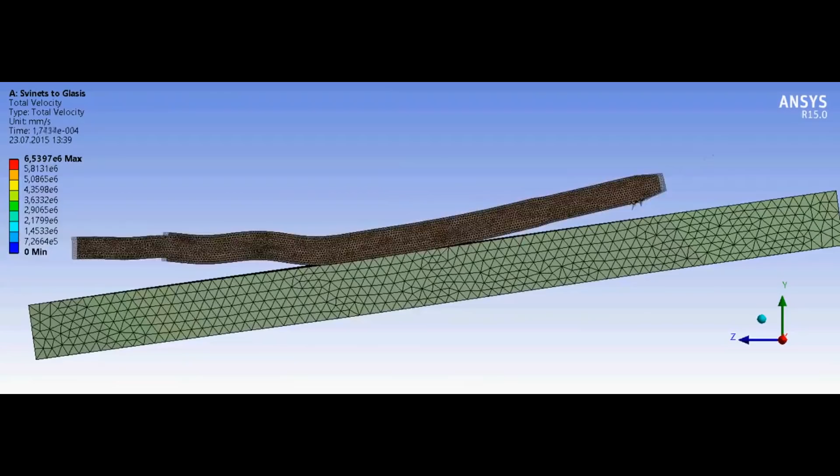Even more so, some even claim APFSDS can't even ricochet to begin with, and that they would shatter instead of ricocheting. While some might want to believe that Abrams' upper front plate will shatter any projectile that comes in contact with it, reality is far more disappointing. First of all, you might say Abrams' upper front plate was specifically designed for that, to shatter or deform incoming penetrators. And I would say you are very likely correct.

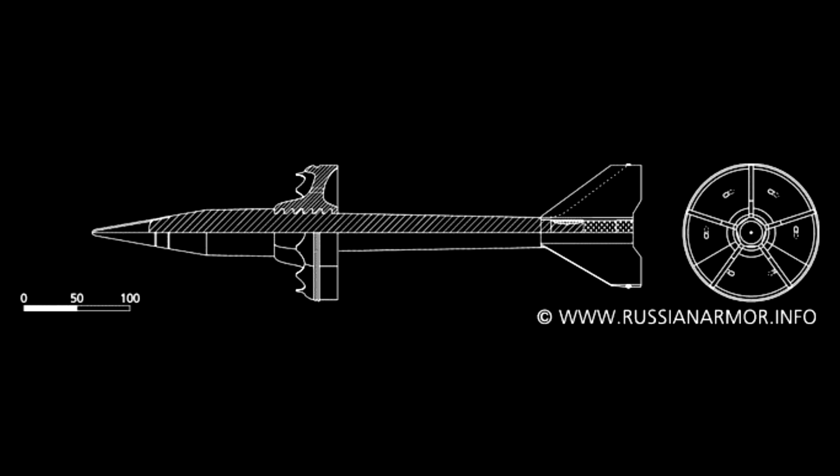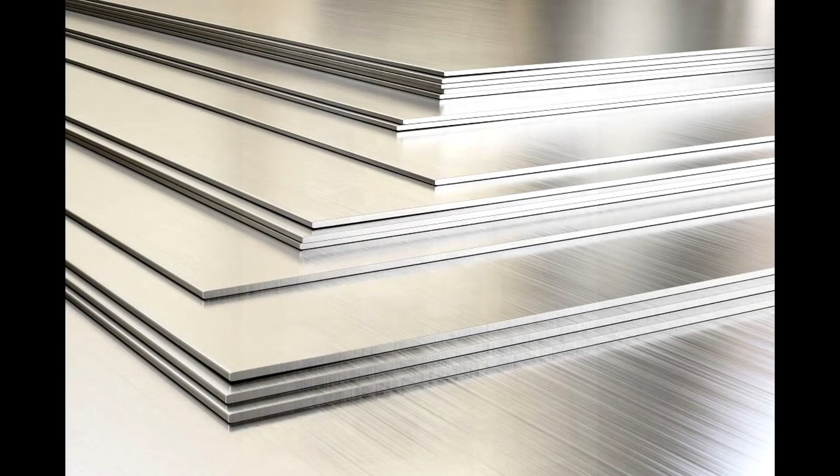But when this armor was designed, it was meant to protect against Soviet steel penetrators that would or would not have a small tungsten core at the tip of the projectile. This was very likely to shatter or deform since the material is much softer than what later projectiles adopted. Mainly, we are comparing sheet-grade steel to tungsten heavy alloy, tungsten carbide, or depleted uranium.

You might also say Russian tanks also have weak spots, why don't you mention them? And all I have to say is, this video is not about them. I am well aware they have problems. This video is about APFSDS shattering on the upper front plate of Abrams.

But what is shattering anyway? It seems to me people are led to believe that APFSDS shattering results in complete disintegration of the projectile into a bunch of tiny bits. I mean, glass shatters like that, right? Well, the problem with APFSDS shattering is that it usually shatters on one part, where the other part usually breaks off, and since it lost all the initial momentum, it can behave like a less powerful projectile, and those leftovers can still do a lot of damage.

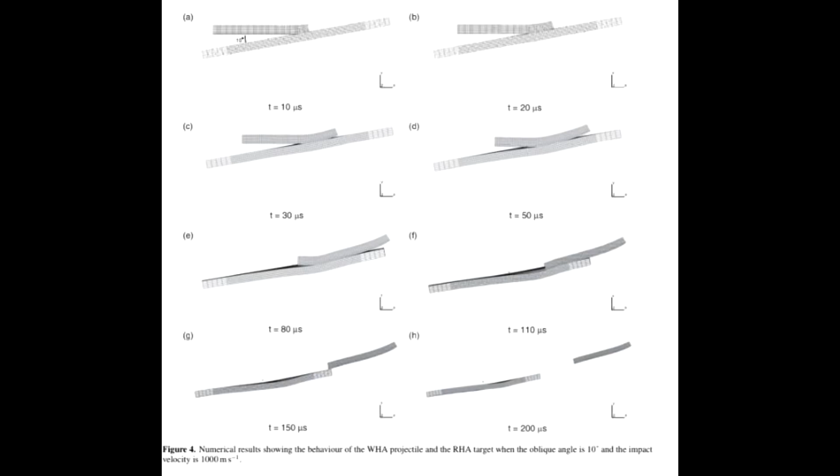In the case of Abrams, they can continue riding the upper plate and strike the turret ring, ultimately jamming it. But that is more likely to occur with longer projectiles. Old Soviet steel projectiles might not have enough energy left to achieve anything, so against them it probably was useful. But now we come to tungsten.

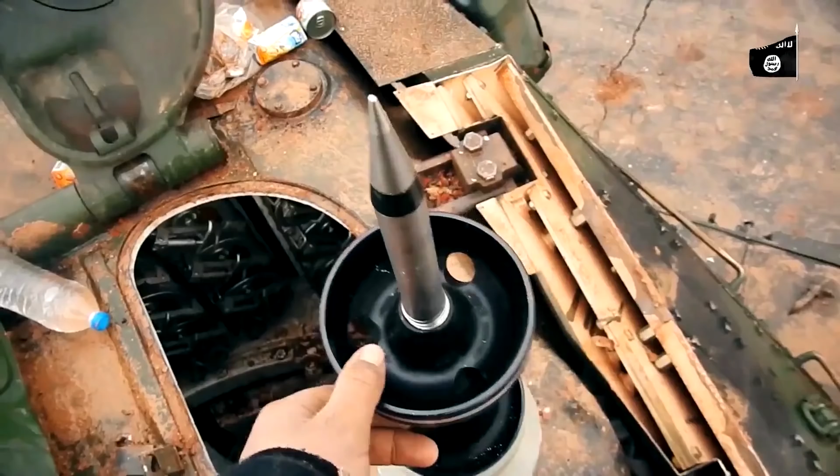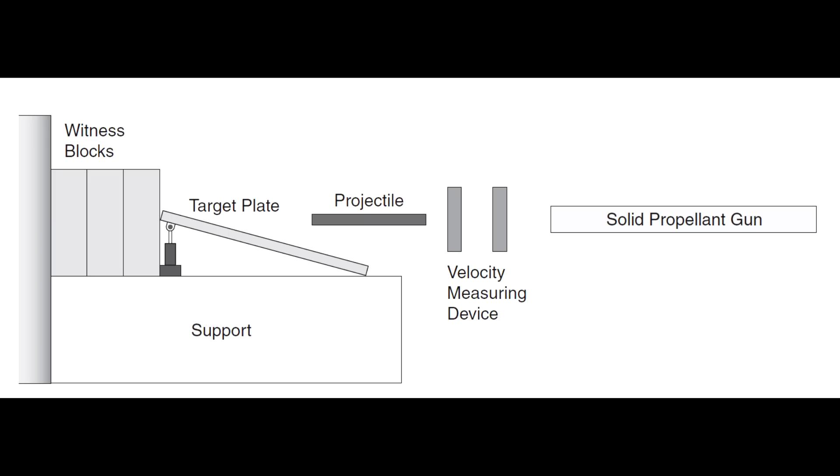There have been lab tests done to test the behavior of WHAs, or tungsten heavy alloys, on oblique angles. The penetrator had a length to diameter ratio of 10.7, which is even short for modern standards, since those tests are almost two decades old. The target plate was of similar thickness as the diameter of the projectile, and it was made out of class 4 rolled homogeneous armor, which is apparently similar to what Abrams might be using.

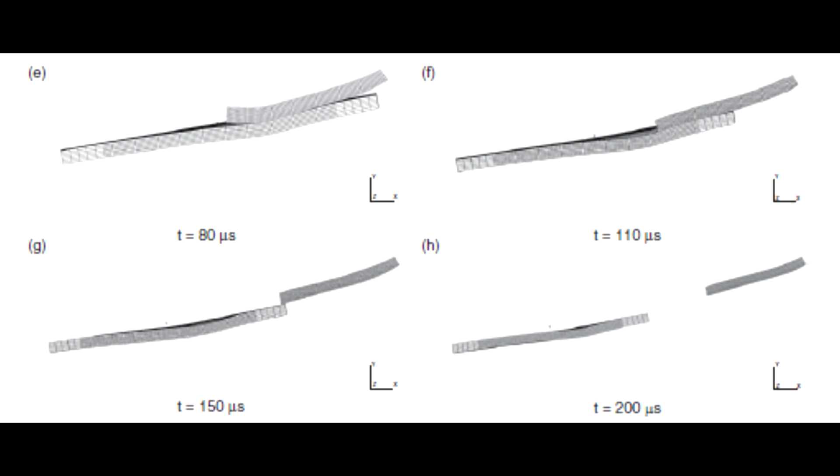It was concluded that the velocity had a massive impact on the angle where a critical ricochet would occur. That is a ricochet, by the way, not shattering. Shattering might occur at even lower angles. But anyway, here is a quote from the document.

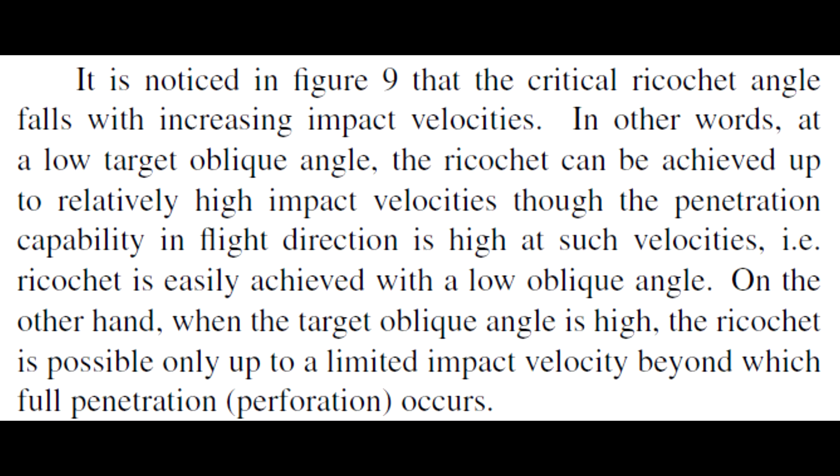"It is noticed in figure 9 that the critical ricochet angle falls with increasing impact velocities. In other words, at a low target oblique angle, the ricochet can be achieved up to relatively high impact velocities, though the penetration capability in flight direction is high at such velocities, i.e., ricochet is easily achieved with a low oblique angle. On the other hand, when the target oblique angle is high, the ricochet is possible only up to a limited impact velocity, beyond which full penetration, perforation, occurs."

This basically means that complete penetration will occur until a critical angle is achieved. Once it reaches a critical point, it will start bouncing off. On this chart, the white square marks where the projectile achieved perforation on the plate, and the black one where the projectile ricocheted. As you can see, at a velocity of 1500 meters per second, the critical ricochet angle is at 5 degrees, while at around 6 degrees there was a complete perforation of the plate.

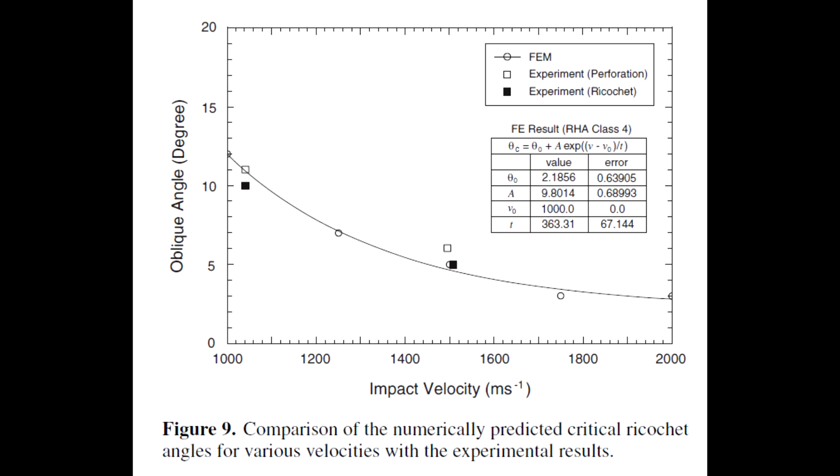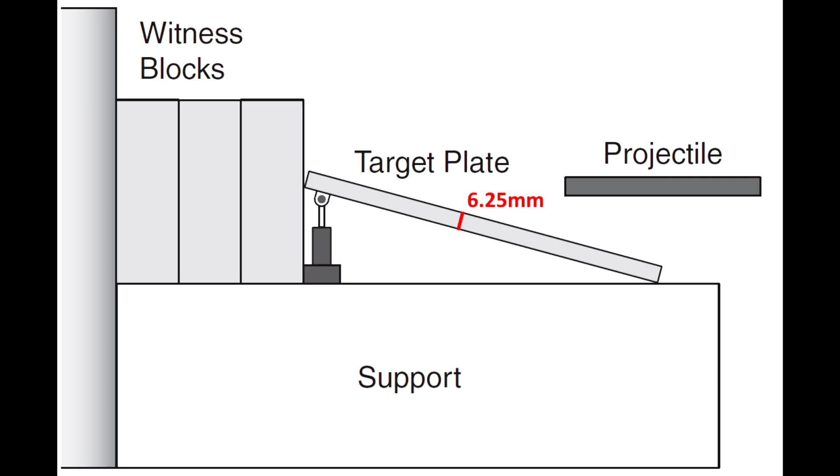There are even images of the tests in the document. This is how the targets were set up: one very sloped plate and 3 thick witness blocks at the end. The witness blocks are each 38mm thick. The target is 6.25mm thick. The projectile is 75mm long and has a diameter of 7mm.

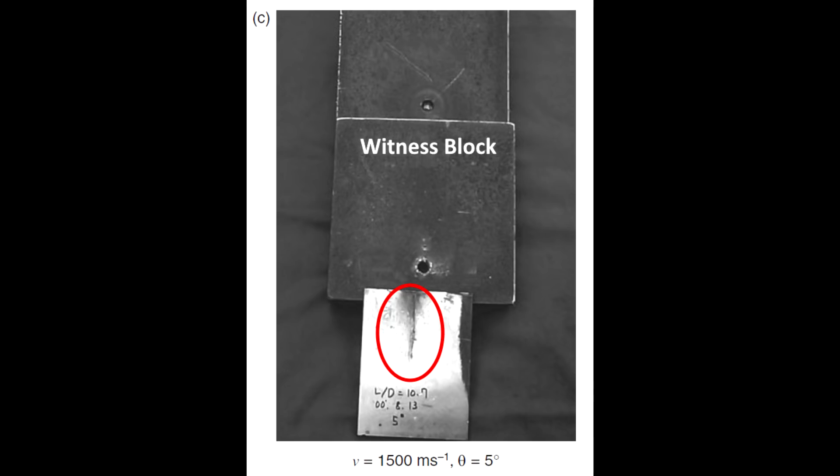As you can see on the 5-degree impact results, the projectile ricocheted off the plate and managed to penetrate the first witness block completely and got stopped somewhere midway through the second one. This not only means that APFSDS can ricochet, but it also means that they can retain a big portion of their penetration. For a 75mm long projectile to penetrate over 40mm of armor after bouncing off is very good.

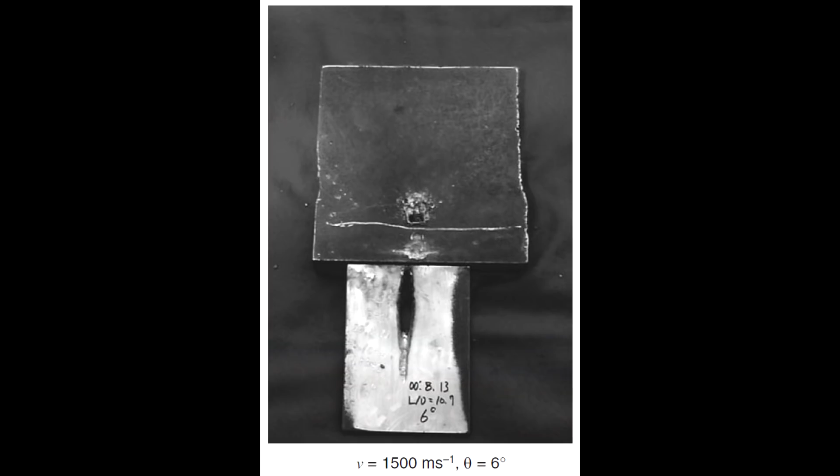Now, we have trial results of the 6-degree target. The projectile appears to have broken off at some point, but complete penetration of the plate did occur, which can be seen in the damage done to the witness block. This might not seem like a lot of damage, but it doesn't matter. In the case of M113, or some lightly armored vehicles that focus on sloped armor, this is bad because all the fragments from the penetration would enter the vehicle.

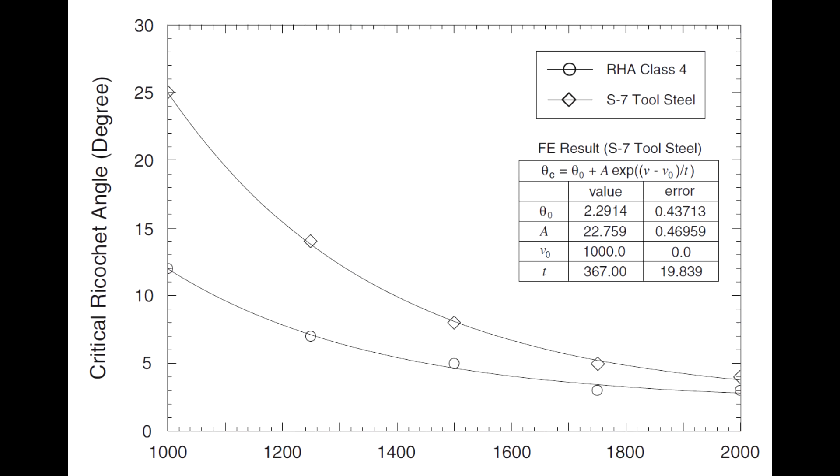Now, here is the biggest issue. The higher the velocity, the lower the angle required for APFSDS to ricochet or break. Most of the modern projectiles have much higher velocities and would be striking the target at 1600 to 1700 meters per second, which would mean that the critical angle would be even lower than 5 degrees.

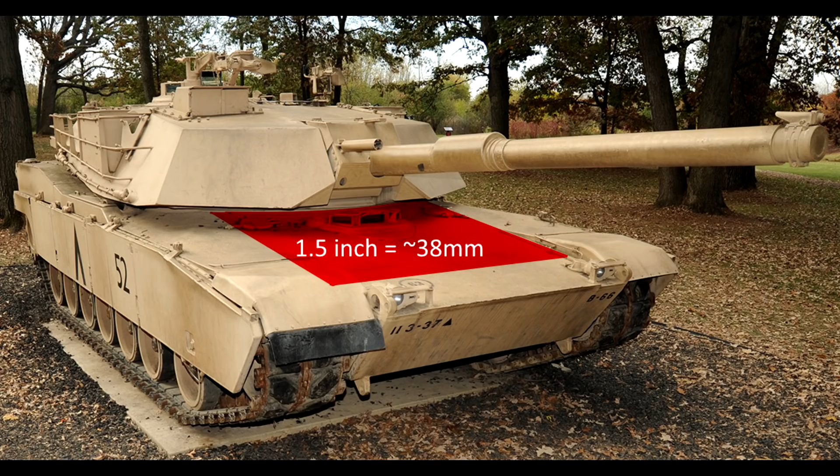Now, what does all of this mean for Abrams? Well, Abrams has a 38mm thick plate angled 7 to 8 degrees from the horizontal, which is well beyond the critical ricochet angle, not to mention the shattering angle for tungsten penetrators. If any tungsten or DU penetrator with high velocity and even semi-decent length to diameter ratio hits that plate, it would most likely go through.

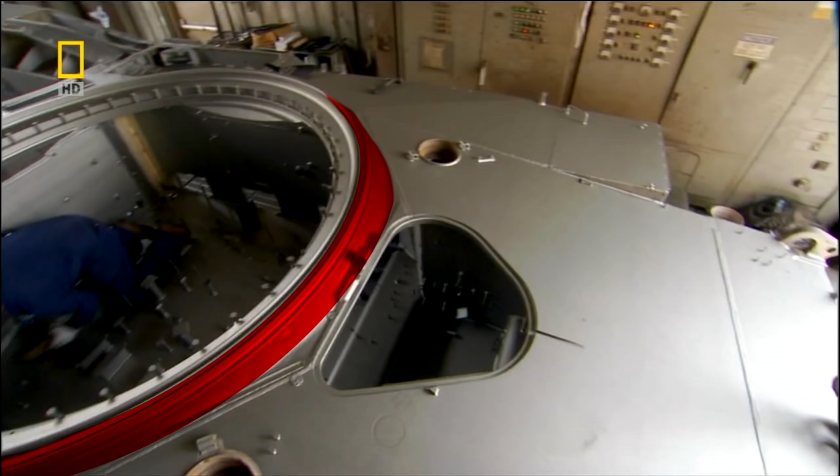Even if a projectile strikes the plate at more oblique angles, the projectile is very likely to ricochet off the plate into the very much exposed turret ring, which is another issue. There might have been some changes to the upper plate where the material might have been changed to a steel of higher hardness, which would slightly increase the protection, but even that wouldn't improve a whole lot on the situation.

The way to fix the plate is to up-armor it with add-on armor, like Germany is doing with Leopard 2A7 and what Sweden has done from the start with their Strv 122s. On Swedish trials it was concluded that the add-on armor on the upper plate would boost the protection greatly. And we know it's possible on Abrams because Iranian Zulfiqar 3, which is pretty much a knockoff Abrams with very comparable armor design, has some form of add-on on the upper plate.

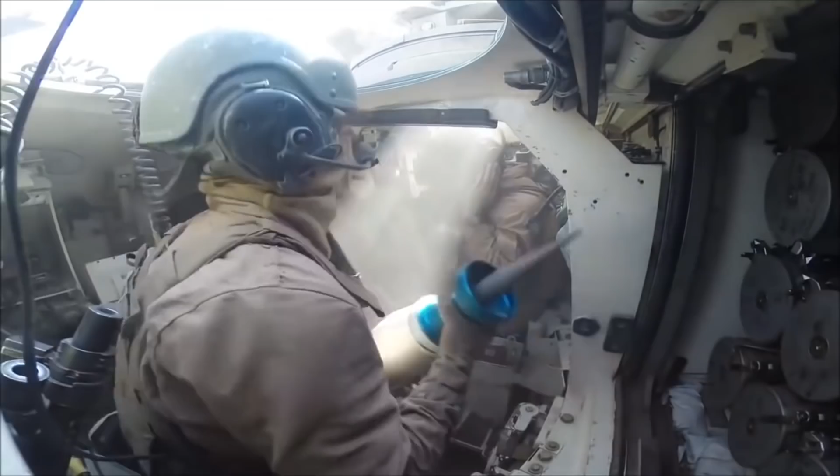So why doesn't the US do that? Well, what I think is the case is they don't really need nor want to. With the recent installation of Trophy active protection system, they made sure that HEAT munitions are no longer a threat for the tank. Facing off a tank in modern warfare which would actually shoot you with a modern projectile is very unlikely, and even to hit Abrams there is also hard to achieve in real warfare. It's possible, but not very likely to happen.

So when you take into consideration that the thing that can achieve penetration is extremely unlikely to face Abrams in the modern era, it's also very unlikely that it will get hit there. So taking all of that into consideration, the chances of Abrams getting hit there by a powerful APFSDS in real life are close to zero. Not to mention that the engineers are actively trying to reduce the tank's weight because of the bridge crossing and transportation issues, so adding a bunch of add-on armor would be counterproductive.

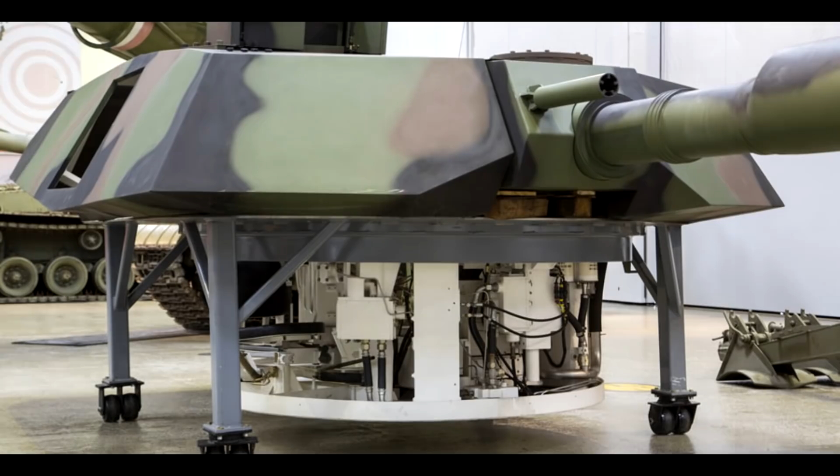There is a reason why the turret has always been better protected than the hull on Abrams, because based on combat experience, the turret is far more likely to get hit than the hull, so they are improving the protection where it matters the most. Now, War Thunder is not real life, it's a video game, and of course it's a game where tanks fight tanks, and the battles usually occur at much closer ranges than they would in real life. So people find themselves getting penetrated there more than they'd like to, so they thought it would make a difference if they started complaining about that.

But I'm sorry guys, APFSDS certainly can ricochet, and even so it takes very steep angles to start affecting the incoming projectile. The upper front plate of Abrams tanks is just not steep or strong enough to counter modern penetrators, which would most likely just go through it. There are a lot of pictures online of tanks being penetrated at very steep angles by some APFSDS projectiles.

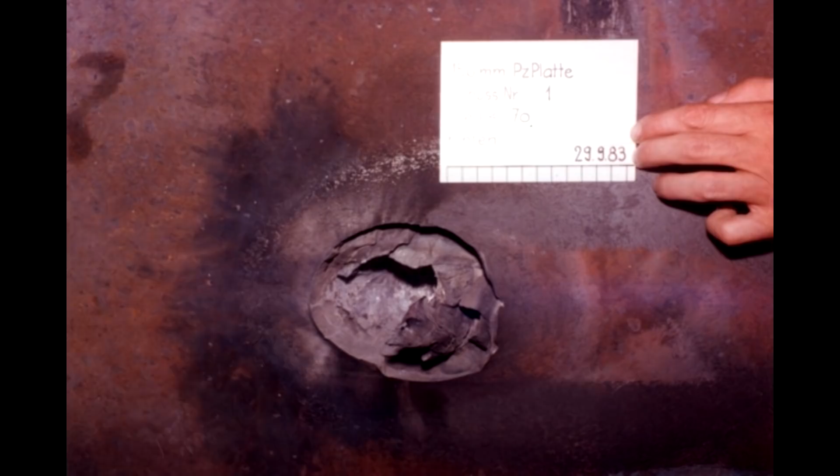And also, not to mention that Abrams getting hit on the upper plate directly from the front is extremely unlikely to happen. Tanks don't fight in a flat area. A hit might come from above or below, so that might increase or decrease its effectiveness. And don't be fooled, APFSDS penetrators have very minimal shift in drop angle. It would most likely not even reach 1 degree at standard combat distances.

And seriously guys, I'm having a blast with Abrams in War Thunder, even more so after they gave it M829A1. It's my second favorite tank in the game, after Leopard 2A6 of course. That thing is completely broken.

And the point of this video is not that War Thunder is realistic, it's far from it, but the point is to clear up any doubts about the performance of APFSDS on steep angles. Of course, the tests I showed in this video may not be 100% proof of the behavior of such armor, and we might only know if someone shoots an Abrams tank with a modern APFSDS projectile, but they give us a good idea of how projectiles might behave in such scenarios.